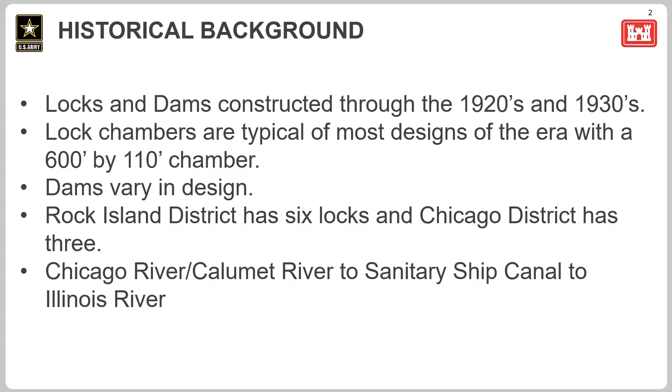This here gives you a profile of what the river looks like if you could slice it right down the middle and look at it from upstream to downstream. As you can see on the right-hand side, there's quite a steep drop-off. Each one of those little stair steps represents one of our locks and dams on the river. As you go upriver, you're going to see quite a bit of drop difference between what we call pools. That's how we've got to be able to get these boats up and down this river. Using that locks and dam system is critical in order for us to be able to provide that service to the country.

On the right-hand side, you can see where the locations are. Way up on the upper end of the Illinois River, you can see how tightly grouped they are, as well as how necessary it was because of the steep drop-off in the river. As you go downstream, below Starved Rock, they start to spread out, between Peoria and LaGrange. It flattens out, and there's a reason why their dam is the way that it is, and we'll get to that. Some of you guys are familiar with the wickets, or maybe not, but you're going to be here soon.

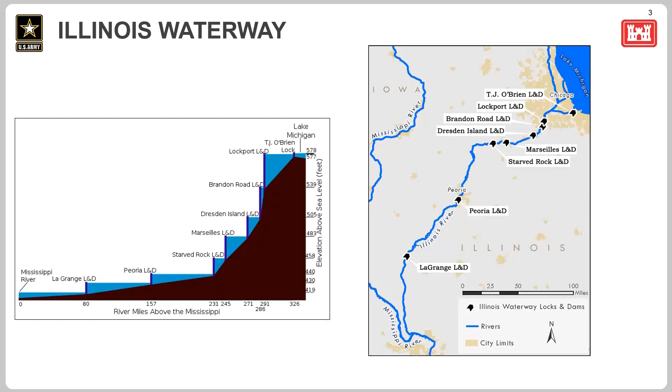On the Illinois River, at each lock, the staffing is set up with 10 operators at each site. Those are your actual lock operators. Just 10 guys keep that thing operating round the clock, 365 days a year, 7 days a week. Those guys are where the rubber hits the road. Then you have your support people at the lock itself, like a maintenance mechanic, the assistant lock master, and the lock master, who has site supervision over the whole site. And then we'll have a term employee, which is somebody we bring on as an entry-level position in hopes that we can retain them if they so desire.

Also, we have our repair units, which are based out of Peoria, down by Komatsu, if you guys are familiar with it. That's actually our boat yard. That boat yard houses our lock support infrastructure, which is all of our repair crews. Our dredge crew comes out of there to keep digging the channel out, to keep that 9-foot channel open as well. Those crews have light and heavy lift capabilities. You can see up in Chicago, they're working in that lower left picture, and pouring concrete in that upper picture. They do all kinds of different tasks, not just locking boats.

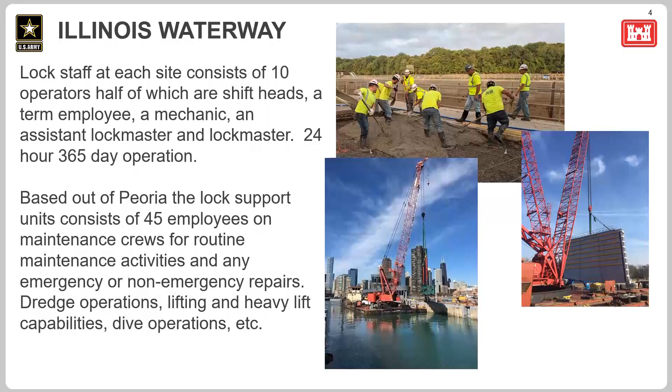Then over on the right, you're going to see a heavy lift crane. That's our Hercules. That crane is designed to pick up what you see there, a large miter gate. We'll get into miter gates a little bit, but basically those are the gates for the lock chamber that hold back the water when you're taking water out of the chamber to move someone from the upper pool to the lower. They swing in and out and meet together in the middle, what we call a miter, that's why they're called miter gates. That crane can lift that large structure and put it in place, and if they need repair or are damaged, they'll hook onto it, pull it out, and make those necessary repairs.

Starting upstream, we'll go all the way up to Lake Michigan. Chicago Harbor Lock, you can see it was built back in the late 1930s, and it's basically the same dimensions, with the exception that it's a little narrower, 80 feet in width. It's a sector gate design, and what that means is these are the gates here, all 4 corners have a gate. These are pie-shaped gates, designed to prevent reverse flow of the Chicago River.

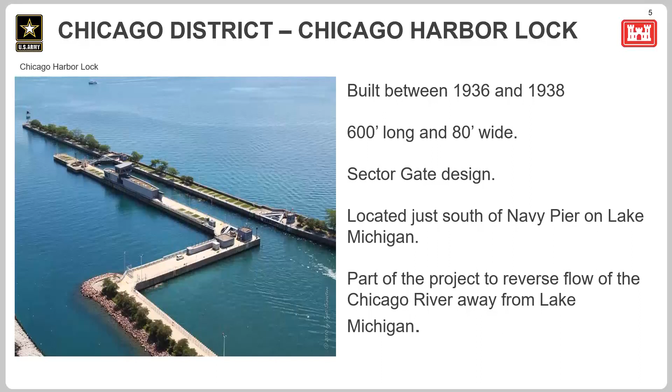Back when they started putting in the system, the city of Chicago, up on the lake, when you go up there you'll see some structures out on the lake. Those are your intakes for the water supply in Chicago. Well, they don't want the Illinois River going out towards the lake, they want to keep it going the other direction. So those gates serve the purpose of keeping reverse flows from happening, and also allowing vessels to be able to come from Lake Michigan into the Chicago River.

O'Brien Lock is on the south end of Chicago. Again, it's the same type of sector gates that you see there, for the same reasons. Typical lift at both of these is just a few feet, so the differences in pool are going to be very minimal, but they are critical in protecting Lake Michigan and also still allowing navigation to make its way from Lake Michigan into the Illinois waterway system.

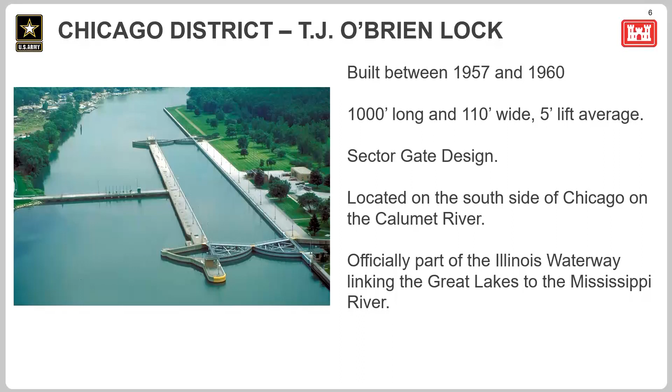Now we're going to get into where we get some pretty steep drops in the river. This is Lockport Lock, named for the city of Lockport. It has a 600-foot chamber, 110-foot wide, with a nearly 40-foot lift on average.

When you're standing at the side of that lock chamber, when they have that water all the way down like you see in the photo, it's a significant drop. You're looking way down on these boats sitting in the chamber as they're getting ready to shove out. So it's pretty impressive.

They've got these tall miter gates on the lower end, and on the upper end this is a vertical lift gate. It just goes up and down. When they fill the chamber, it ducks down behind this sill, and traffic can go right over the top of it. Then they lift it back up so they can open valves, because there are valves on all the locks that they use to dump the water from the chamber down to the downstream end where it discharges.

A lot of people have a misconception, thinking we use pumps or some kind of mechanical means to get water in and out of the chamber. It's gravity, that's all it is, just like flushing your toilet, it's really that simple. You have valves and tunnels running through these walls, so when you open the valves here, that allows the pool to fill this chamber. Once you close those valves and open the valves down here, it allows the water to run out the lower end. That's all it is, just gravity.

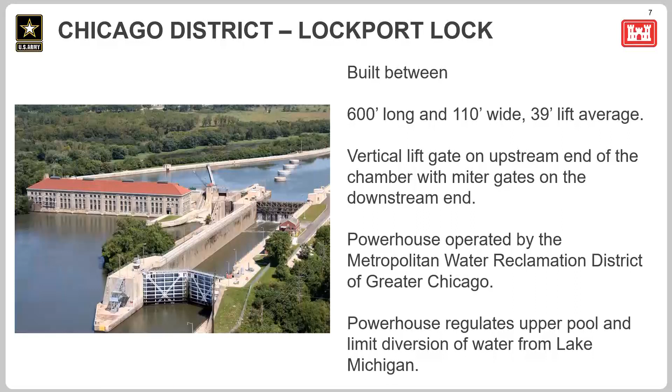If you look over here, the old I&M Canal lock is right there, and you can see the difference in size between the two. That power plant is not operated by the Corps of Engineers—it's a private entity, but they do control the pool up above.

So moving on to Brandon Road now, again a high lift lock. Brandon Road is located in Rockdale, just on the outskirts of Joliet. They have a long dam made up of 21 Tainter gates, and some decommissioned head gates that they used to help control pool. This year, if you remember from 2020, we had major rehabilitations on the Illinois Waterway at Peoria, LaGrange, Starved Rock, and also Marseilles.

They're doing the same thing with the upper reaches of the locks this year. For 2023, they're going to be shutting down Brandon Road and the next two locks I'm covering after this for four months to do major dewatering and rehabilitation. It's a major construction effort that is needed.

It's something we don't get much opportunity to do, and we had to coordinate that through our industry partners, the towing boats you see going up and down the river. It's a huge undertaking, but much needed, because these locks don't get the attention they need since we operate year round. Shutting the industry down for four months is a huge undertaking.

The other thing I wanted to mention, down at the bottom it says fish barrier project. You've heard about the invasive carp—you see videos of guys catching them with nets or hitting them with baseball bats. Anyhow, there's a tremendous threat and fear of those getting into Lake Michigan.

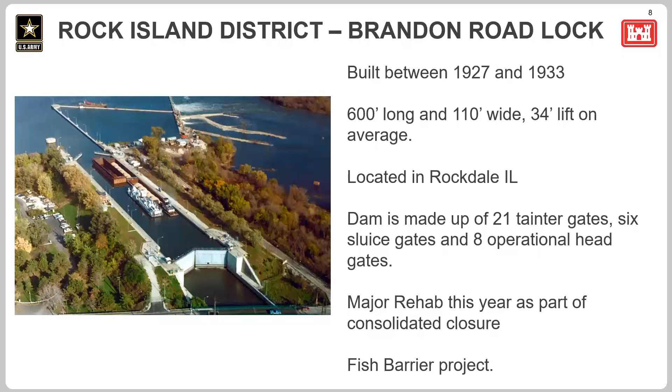The Corps is undertaking a project in which at Brandon Road they're going to put a barrier system down below that's an electrified system. They're going to electrify the river, and also use an acoustic barrier and a bubbler barrier to prevent Asian carp from going up and down the river toward Lake Michigan. There's another barrier in Chicago District at Romeoville that does the same thing, but this will be the first line of defense, with that one being the second. So there's a lot of work involved in that.

All right, so down the Dresden Island Lock. This is a lock located outside, just upstream of Morris, Illinois. Again, pretty much the same dimensions, 22-foot lift, and 9 Tainter gates.

Down here you can see a Tainter gate before installation, new construction. This is what a Tainter gate looks like, and they fit in right over here. This is the upstream side of the Tainter gate, and this would be the downstream side, so this is the side holding back the water. They'll have 9 of those Tainter gates, plus some decommissioned head gates and stuff.

That's how you control the pool. If you get a heavy rain up north, or some ice melt or snow melt, you'll open up those gates as the pool rises and let that water go. This is part of another major rehab, which for all these sites will include replacing gate machinery, replacing the upper miter gates, and doing a lot of vertical concrete work on the lock walls. So yeah, a lot of work going on.

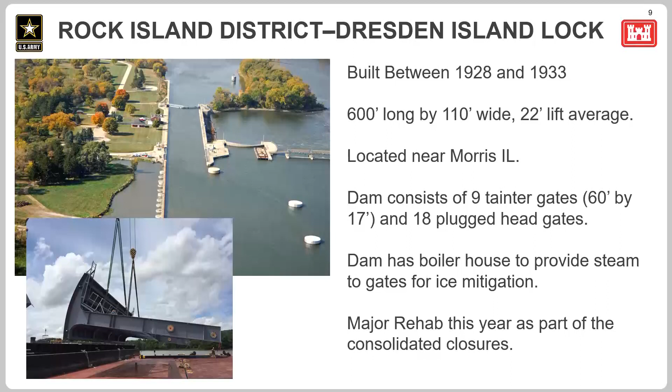Marseilles Lock is located in Marseilles, Illinois. It's unique in that the lock is located 2.5 miles downstream of the actual dam. There's actually an island here. If you go up the canal toward the dam, the dam is actually located here, and the stream is over on the other side of this island, controlling the pool above that stream, and also controlling the pool here in the canal.

It's got a 24-foot vertical lift with 8 submersible gates. The reason that's different from the one I showed you before is that the submersible gates can actually be submerged, as opposed to just letting water pass under them. The advantage is it allows ice and debris to go over the gate to keep the dam clean, and they're easier to maintain because you can operate them in ice conditions without having to do what's called steaming the dam, using a boiler like at Dresden and Starved Rock, where you physically go out there with steam and cut ice off the gates to keep them operational.

They're going to have electrical rehab this year. They're going to replace a lot of electrical components and do a crossover from the main lock house to the old lock house, where the electrical is currently located. They're going to remove it from over here and do a bunch of electrical work that desperately needs to be updated.

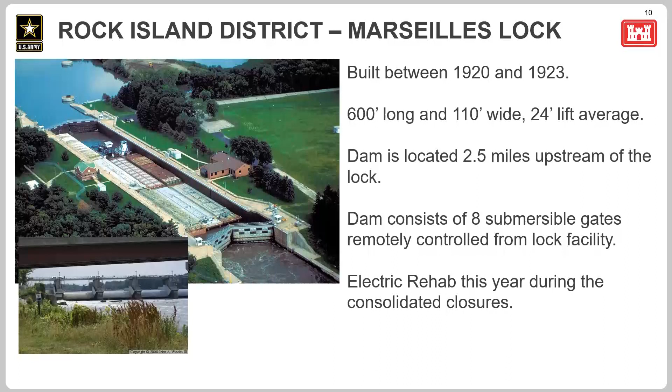Starved Rock is a lot like Dresden Island in design, with the Tainter gates. A lot of you guys may have seen it. If you go up to Starved Rock and get up on the bluff, this is the view from the bluff in that lower picture. The other one is a view from an airplane, so if you've flown over Starved Rock, that's what it might look like.

I worked at Starved Rock for 6 years. Beautiful place to work, especially in the fall, and a very busy place to work. It's home to the Illinois Waterway Visitor Center, so if you're planning a trip and want to see the state park, the visitor center is located right there at the lock. They have some great exhibits there, so if you want to learn more, you can go there and stand up on the balcony and watch tows lock through.

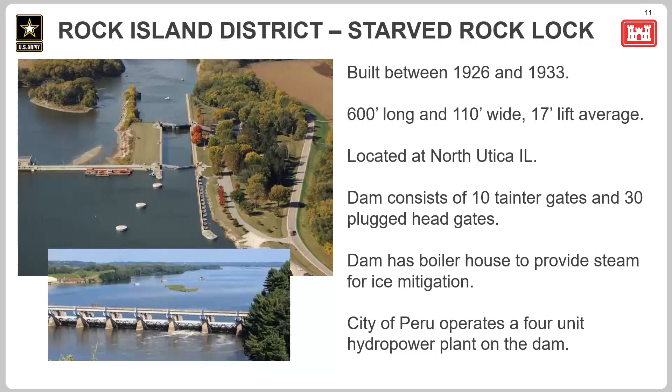All right, moving down here to where we're at, Peoria Lock and Dam. I spent a lot of time working here as well. It's unique in design, as you can see from the photographs, because this guy here is going right over the dam. What's he doing out here and not in here? Well, you've probably heard people say the wickets are up, the wickets are down, and we'll get into that in a minute. Basically it's just an average of about 6-7 foot lift.

If you remember from the earlier slide, the river's starting to flatten out now. So now we have to use these wickets so that we can use what's called the navigable pass, and that's what this is. When we get a lot of water, which we actually got a shot of this week, the wickets went down earlier this week, and now we're running traffic over that pass, just as you see illustrated in that photograph.

It's starting to fall out. They may be putting that dam up in the next day or two, and when they do, it'll look like this down here. And they'll use this apparatus here, which is a maneuver boat and a small tow vessel with an excavator that raises and lowers those wickets. I'll give you a more detailed description of that in a few minutes.

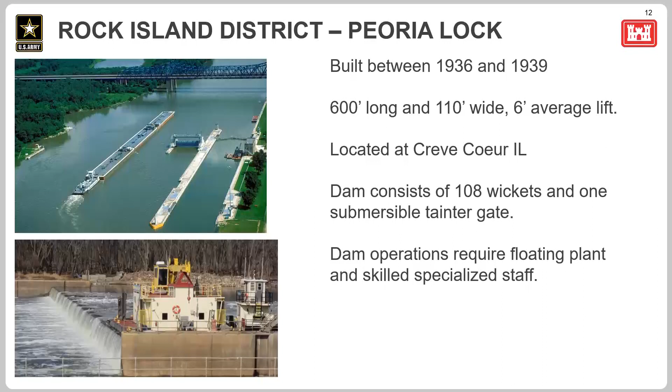LaGrange, basically, is down by Versailles, Illinois, and it's the same concept, same design as Peoria. It looks the same. They just went through a major rehab this year as well. Their operating system, the drive system for their gates and valves, have all been changed. All the concrete's been replaced. Their hydraulic system has been replaced.

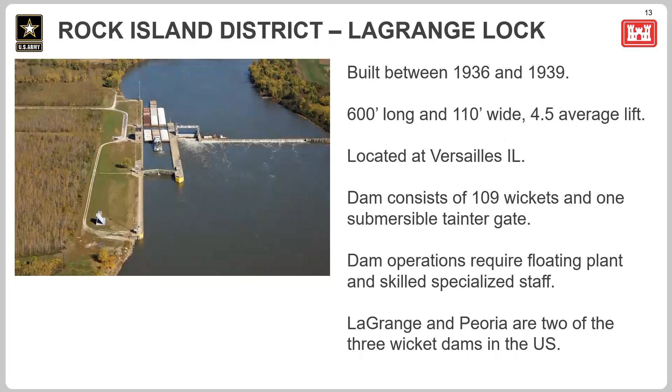So yeah, a lot of work is going on there. Peoria has 109 of those wickets. LaGrange has, sorry, Peoria has 108, LaGrange has 109. And the wickets at Peoria are a little bit taller, 16 foot by 4 foot wide, while LaGrange's are 14 foot tall by 4 foot wide. As it says in there, LaGrange and Peoria are two of three wicket dams that exist in the United States. The other one is the Olmsted Lock, which is a completely different animal. It's new construction, and it's like comparing apples and oranges between the two.

Wickets, okay, so getting into the wickets. I figured I'll touch a little more on this because most of you guys have probably seen this. As Dawn had said, driving over the bridge, you look down there and you're like, what in the world? Well, here's your crash course. So LaGrange has 109 wickets, 14 foot tall. That kind of blows that whole flatten-out river theory right out the window, doesn't it? Yeah, 109 wickets, 14 foot tall. Peoria's got 108 wickets, which are 16 foot tall.

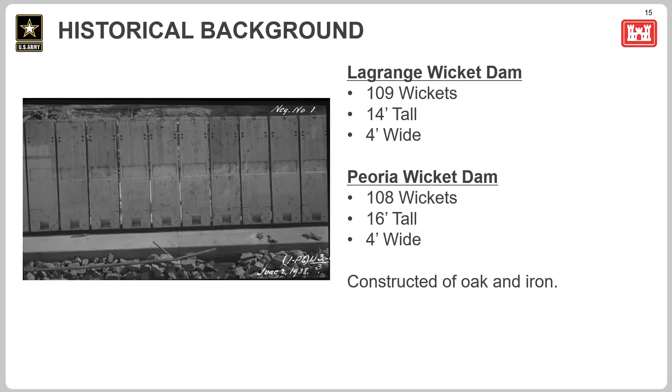This is a historical photo during the construction, those are LaGrange wickets, I can tell just by looking at them. That's a historical photo of the construction when they were building it in the dry. This is the upstream side of the wicket here, and the downstream side is on the other side. So this is the face of the wicket facing upstream. On the next page, you'll see the downstream side. You can see it's pretty complex.

This is a lot of fun to dive on. There's a lot of stuff going on in here when you're down there and you can't see. It's underwater and you are blind. The question you get asked all the time is, what do you see down there? Nothing, it's pitch black. But you know what you're looking for or feeling for, let's put it that way. So you go down in there, you got the hurter here, which holds the prop that stands the wicket up, and you got the horse, and down in here you got these little horse blocks that are bolted into the river bottom. You go in there and start tearing that stuff apart if you need to replace a wicket, or start putting it back together.

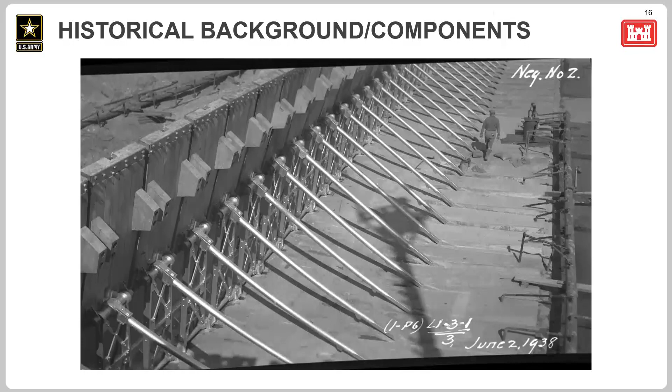So here's a wider version of it, a bunch more of these wickets lined up, and down here you got what's called baffle blocks. Those help with the turbulence and reduce scouring below the dam. As you can see, that's all of them in a row, not all of them, but a significant portion of them in a row there.

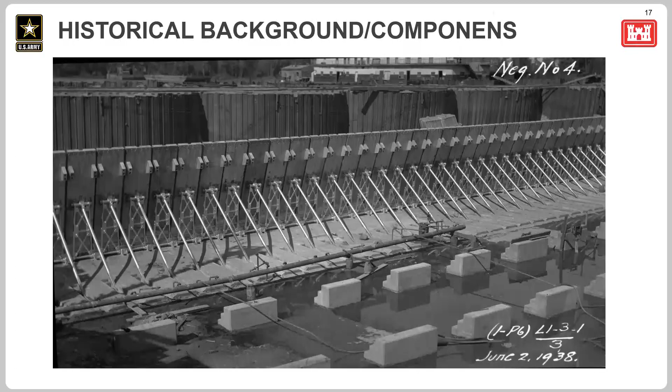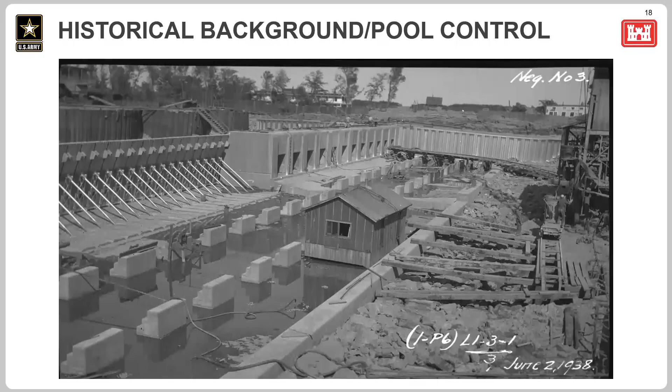These, again, this is LaGrange. Another view of LaGrange, just some of the old apparatuses they were using for construction back in, this is June of '38 when this picture was taken. And then over here was the weir wall. They used to have these butterfly valves in there where they controlled the pool. Well, that has changed, and what they went to after that was a tainter gate, which I'll get into.

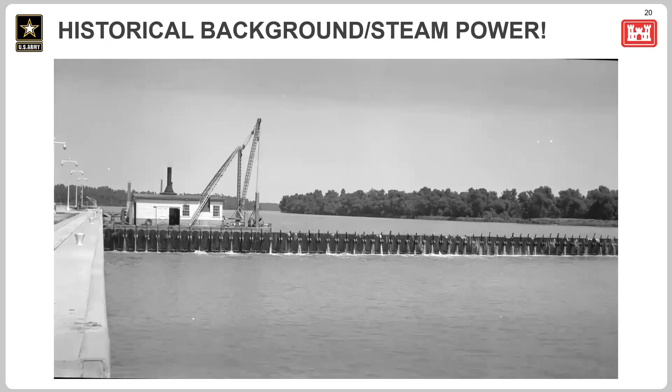So here again, you see the wicket standing up. You got the upstream side and the downstream side. And this here is an old steam-driven maneuver boat that they use. This is the actual machine or boat that they would use to raise each one of these wickets one by one. You have to raise each one by one, or drop them one by one. So it's pretty labor intensive, and even more so back in the day.

When I first came into the Corps, they still used this. I came into the Corps of Engineers in 1987, and they were still using this, even though this was from 1938. They were still using it then.

It's critical for us because ice is a huge issue during the winter months, and particularly at LaGrange it's really, really bad. You can get a lot of ice stacked up on there, and I'll have some examples of that here in a minute. But for the most part, that is your pool control, as opposed to those old butterfly valves.

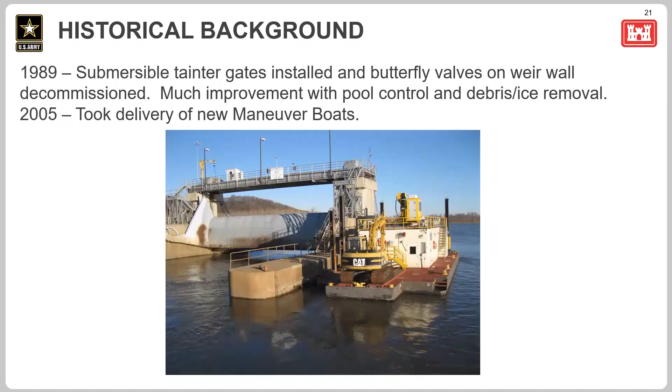So that's the maneuver boat in operation right here at Peoria. You can see the bridge you guys cross all the time, there it is. So they're raising these wickets up in this photograph, and what they're doing is making this turn. They're raising the first 20 wickets, and that's the critical part because it's a lot of jockeying that boat around. Once you get those first 20 wickets up, this boat will bring its stern down and lay flat across the dam, along with the wickets that are standing.

And then the small tow vessel will get on the hip on the opposite side, and they'll have a return winch wire catching a wire on the wall that actually controls the movement of that maneuver boat. Then they'll go on across the river with that excavator and just keep popping up each wicket, one at a time. Sometimes it goes good, sometimes it goes bad.

Sometimes there may not be a wicket there, so that is something that can happen. Maintenance is key. Our guys do a good job of keeping it maintained, but these take a lot of abuse.

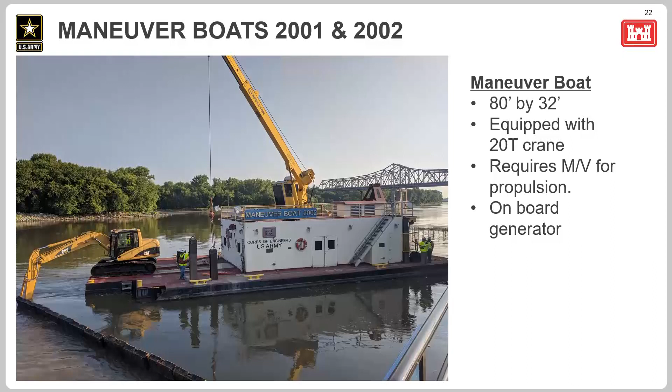How often do you raise and lower those? It depends on pool levels. Some years you could go maybe once or twice to raise and drop. Then other years, I know when I was a lock master there, I think our record at that time was I was out there 19 times, so you figure that was almost once or twice a month. You get these big fluctuations in the river, and things are changing differently now than they did back in the day.

The river doesn't respond like it did just 10, 15 years ago. It's continually its own living, breathing animal. We could go back in the record books and look at how they did things and the conditions they were under, and it could be completely different than what we're experiencing now. It's just the river changes.

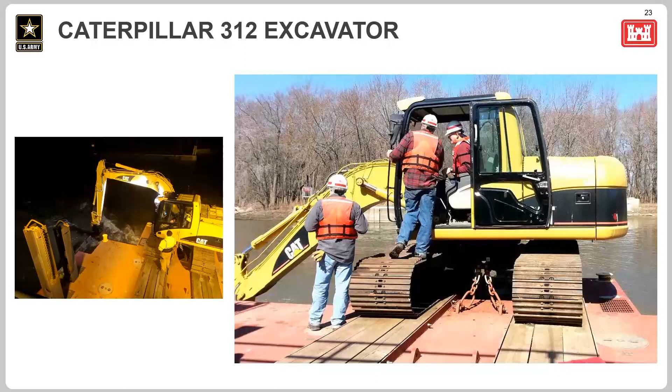So right there is the excavator. They're reaching in to raise a wicket, Caterpillar. And then this is them actually dropping the dam, and it's hard to tell, but you'll see in some other slides how that works. They kind of pull that wicket upstream a little bit to allow the prop to disengage, and they can let it go, and it'll just slam right down to the river bottom on its own, usually.

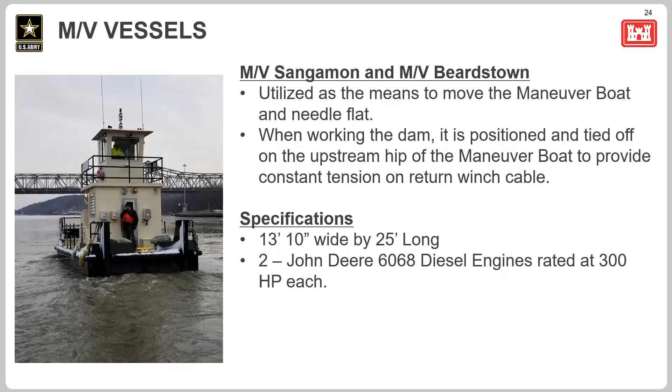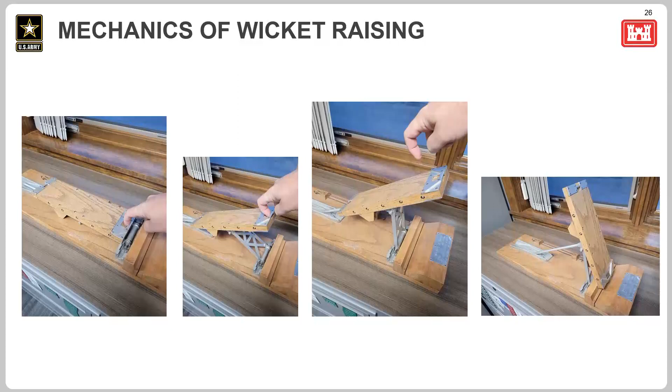Sometimes this hurter gets filled with sand, debris, rocks, cable, buoys, whatever, and it may take a lot of work. You don't know what's in there because it's underwater. So you'll sit there and keep trying to stand that wicket up, and it won't catch, the prop won't catch that part. When it doesn't catch, you've got to keep working it and working it. Sometimes you've got to skip it and come back to it, because once you get the rest of the dam up, you get enough wash going through that hole, it might clean whatever's in there out. Or you can just keep slamming that wicket down and allowing that hydraulic action to kind of whoosh it out. So there's different techniques you can use, and typically we're able to get all the wickets stood up.

On a few occasions you can't, and you kind of let it be, and then you'll go back out and try it again in a day or two. More often than not, you're able to get it stood up after letting it wash out for a little while.

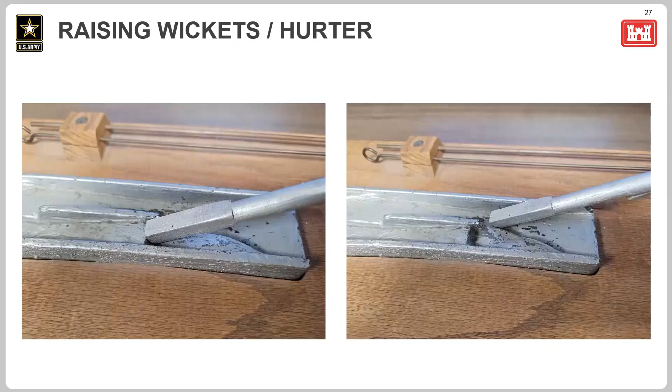The excavator will help a little bit. You'll get into that crack, and the excavator will reach out on top of that 4x4 and shove it to the bottom. So once we have needled the dam, we've got the Tainter gate set at zero. We have done everything we can at that point to hold back water in a drought situation. That's all we can do.

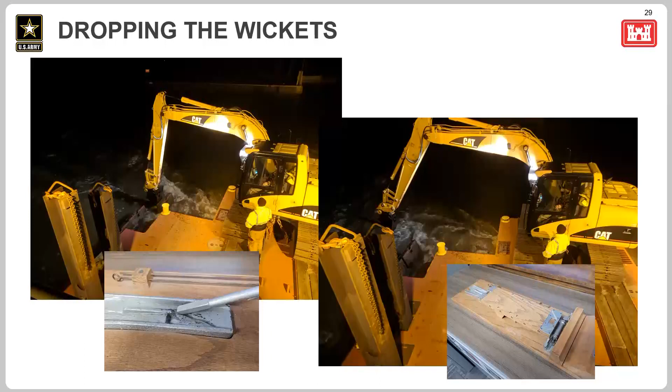So dropping the wickets, again, there's just some pictures kind of illustrating that. They pull up on that wicket. What that does is it takes that prop out of that catch point and slides it over into a little trough there. Once he lets go, it'll lay back down. That prop then will just slide right down the right side of that hurter trough and just free fall to the bottom. It doesn't, you don't lower it down, you don't do anything, it'll just free fall to the bottom.

Fortunately for Peoria, we have an ARTCO fleeting service above us. They help us out a lot with ice mitigation, pushing ice through that Tainter gate I showed you in that previous photo. LaGrange has a Tainter gate too and can move ice through there, but there's no fleeting service above them to really help. It's 6 miles upriver, and they're very hesitant to come down in these ice conditions to do this.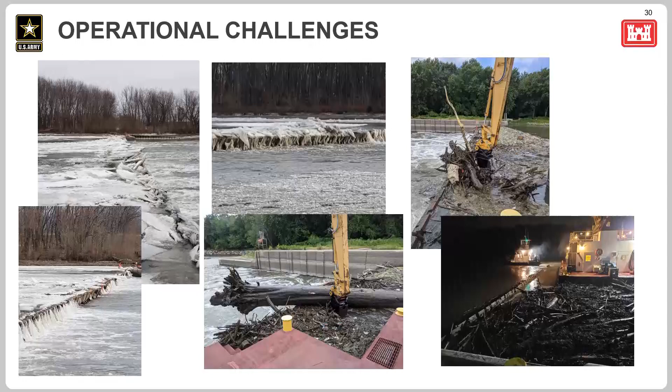These wickets are made out of oak timbers. You're thinking, wow, we're in the 21st century, and we're putting wood, oak timbers, and iron in the river that hold back water. Yeah, that's what we're doing.

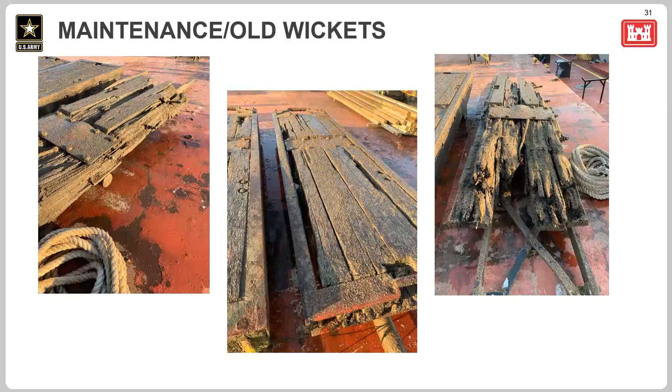This is right here in Peoria, in our boat yard by Komatsu. These guys will rebuild wickets with new oak timbers. They'll take the old wickets, take the hardware off, and put it on the new oak timber. So they recycle that part of it.

Our guys there in the yard are fantastic. They've got so many different skills and abilities - it's mind-boggling the things they can do, from crane operating to carpentry work to diving to iron work to welding to machining. We've got a huge capability there in our project office that still amazes me after 25 years of working out of this project.

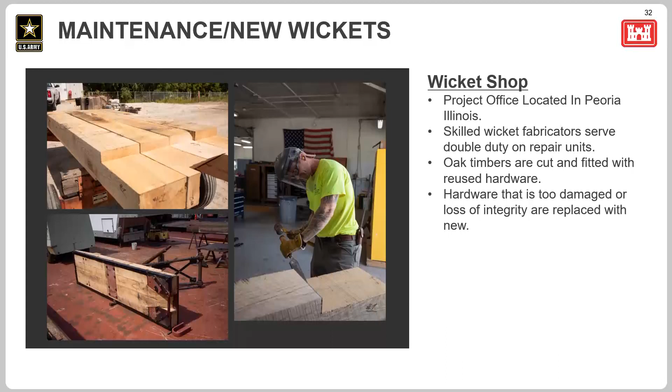So there's a diver - that's not me. I quit that stuff back in 2004. But these guys are lowering a wicket down into the river for this diver to hook it up.

There's a base it hooks into called a horse block, with some bearings and bolts and stuff you use to get that secured to the river bottom so they can put it back in operation. The diver goes down off the maneuver boat into the water and stands by as they lower a wicket down into the river.

On the upstream side they'll have a bulkhead - this is a different type of bulkhead - holding water back from the hole that wicket is no longer in. It kind of takes the place of the wicket. The diver will go in there, hook it up, stand the wicket up, pull that bulkhead, and then move on to the next one that needs addressed.

That gives you some background on a typical dive team and how many people are involved. Divers are dual-rated people - when I dove, I was a diver and a work leader, and a diver and a crane operator during that time frame. These guys have collateral duties and other jobs with the Corps besides just diving.

How do you get someone to dive more than one time? That's a good question. I think we're kind of crazy. Yeah.

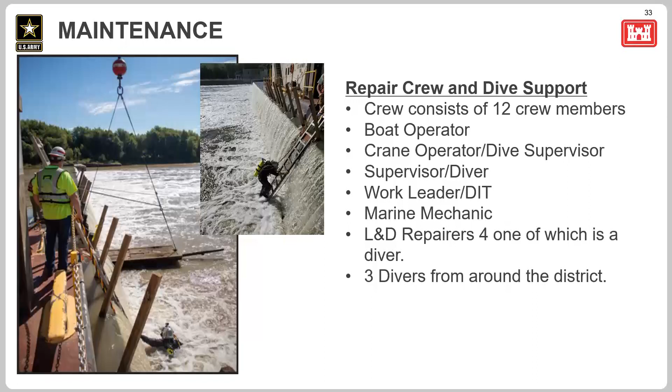However, we have a solution. So I was waiting for it. Click again, there we go. We're starting to get to it, and this is a little bit of a sneak peek. Is this one over here?

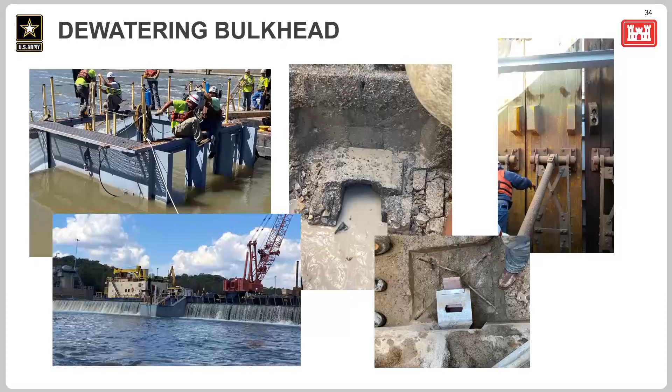There's a horse block that sits on there, and it's bolted with a T-bolt through that base plate, turned 45 degrees, and then it locks in, and then you bolt that horse block down. Then the wickets, the bottom of these horses, fasten into that, and that's why it anchors into the bottom. This is composite material, and we'll get into that here in a minute. So there we go, composite wickets.

Okay, you saw the rotten wooden wickets. So now they wanted to solve that problem. The Corps of Engineers, the Engineering Research and Development Center down in Vicksburg, Mississippi, and the University of West Virginia, those folks collaborated together to put in three prototype composite wickets.

Now I could get into the whole scientific makeup of these composite wickets, but I don't know what it is. I call them plastic wickets, fiberglass, plastic, whatever. But they've been tested to the nth degree. They behave just like their wood counterparts. The engineers did a great job ensuring that they balance the same way, they weigh the same, they drop the same, they float the same. Everything, they did a fantastic job with these prototypes, and we're now ordering them to basically replace all the wickets at both dams. These will have basically a 50-year service life as opposed to 10 to 15 years.

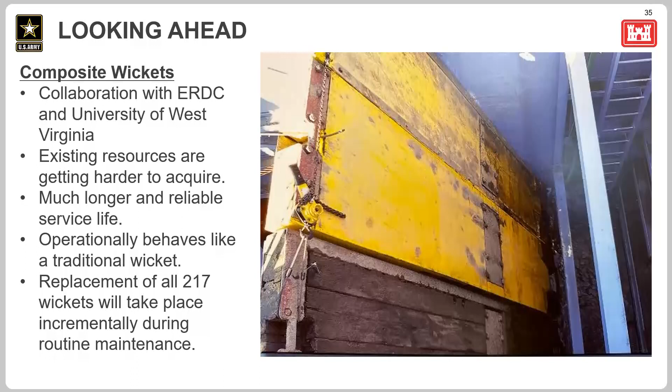So that's something that's going to be changing over the course of the next few years. We'll start seeing more of these getting installed. And the Corps of Engineers, this is a funny story, actually has a historical office up in Rock Island, the district we work out of.

They were concerned that these wickets were yellow and not brown. They were really worried, because history is like, okay, we got to make this, you know, like the lock houses are historical landmarks, the locks are historical landmarks. We don't want to do a whole lot to alter those structures and facilities because then we take away from the historical significance of them. But doggone it, we can't have yellow wickets. So we won that battle. It's one of those things where they kind of brought that up, but the thing is, I don't think the fish are going to mind.